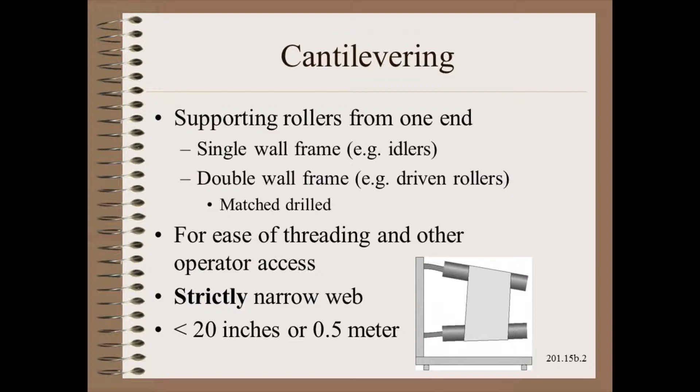Double wall frames are match drilled and have the advantages of being able to drive rollers and possibly align them, much as we would expect of most wider machines. The commonly given reason for cantilevering machinery is that they are easier for the operator to access, such as for threading. In any case, application is strictly limited to narrow webs for reasons we will see shortly.

The tale of the threading ease. Narrow web machines are already the easiest to thread because it is but a short reach to the center line of the machine. Also, threading is done while the machine is stopped or inching. However, consider the challenges met by the paper industry for decades.

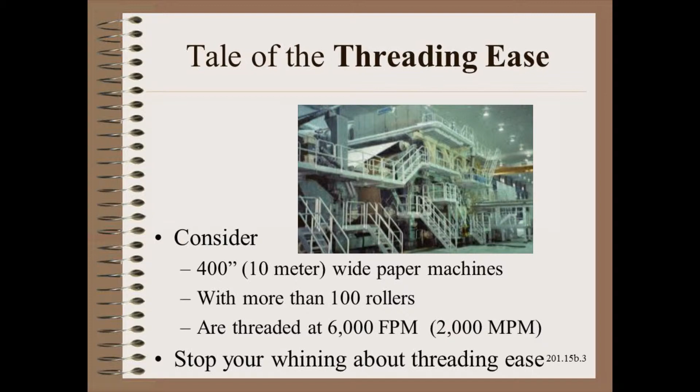Their 400-inch wide paper machines with more than 100 rollers are threaded at speeds up to 6,000 feet a minute. Other industries that can thread at speed include glass and metals. So, the bottom line is this: stop your whining about threading ease!

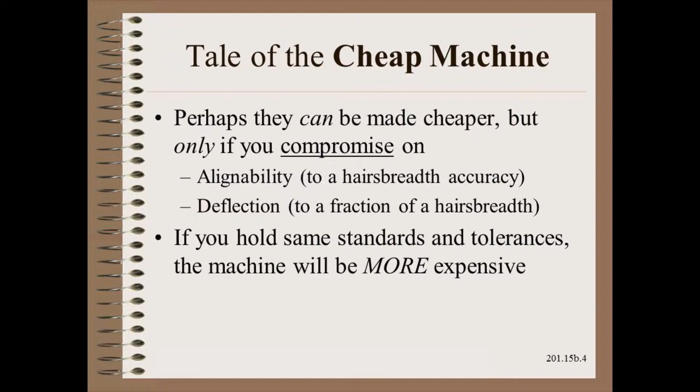The tale of the cheap machine. You may have been told that the cantilevered machine is cheaper. Perhaps it can be made cheaper, but only if you compromise on standards for roller alignability and deflection. If you hold the same standards, the cantilevered machine will be more expensive. You can find much more design information in the must-have book, The Mechanics of Rollers.

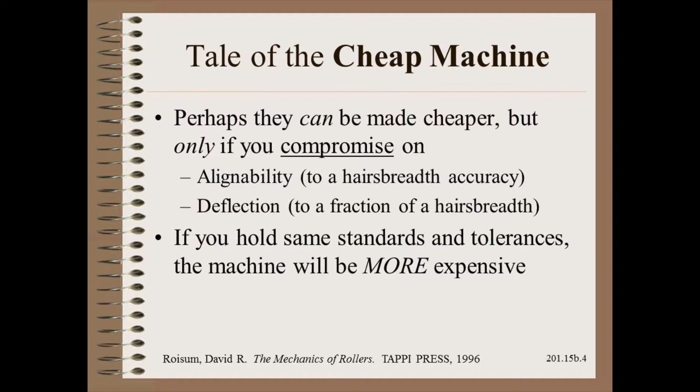Baggy webs are one of the most pernicious problems in the web industries. Guess what? Cantilevered machines almost guarantee that you will be struggling with this problem on almost every supply roll that you run. The reason is this: top rollers see both weight and web tension pulling down. On the other hand, the bottom rollers see tension opposing weight.

The difference in deflection is such that the top rollers sag more than the bottom rollers. This makes much of the machine act like the front of the web is perpetually baggy. This problem adds to the already great tendency to crookedness due to the general lack of alignability of cantilevered machinery.

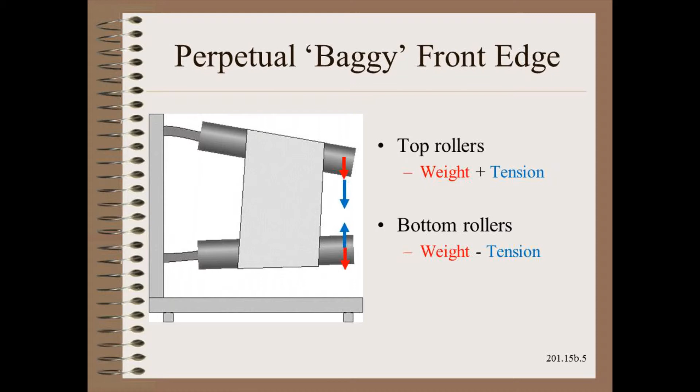There may be a way to have the best of both worlds. That is, to cantilever the frame to simply supported rollers. With this arrangement, you can still have nearly the same ease of access, but have the added benefits of alignability and resistance to deflection. Of course, by the time you do this, you may end up with a more expensive machine than simply supported frame.

Some unwinds that must bear a heavier weight use a front support that snaps into place when in run and snaps out of the way for roll change.

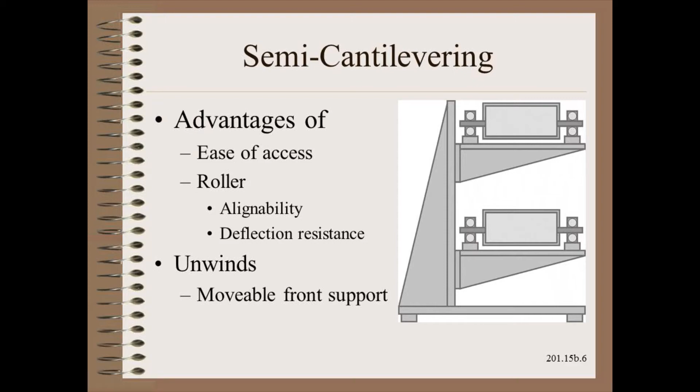Of course, the web world is more than a little bit wide, and there are plenty of exceptions to every rule. One very practical exception to the previous recommendations is for ribbon-like materials, such as cassette tapes, ribbons, strings, and wires. Here, the in-plane bending resistance of the ultra-narrow webs is hopefully small enough to not cause web damage and wrinkle distortion that is risked by wider webs whose rollers are not precise enough.